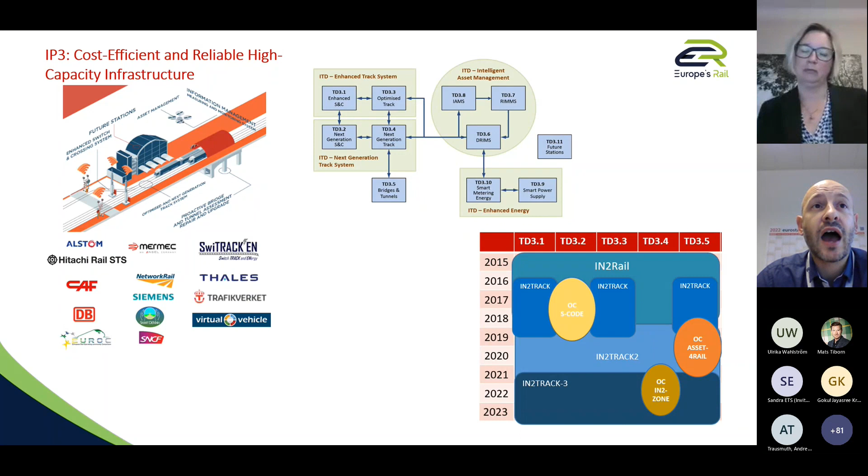I would also like to present a little bit what is coming next, because In2Track3 will end in 2023, but it will obviously not end the research in Europe's Rail regarding this area of investigation. Europe's Rail has been divided - the next program starting now has been divided into 7 areas, so-called flagship projects, dealing somehow with the same areas of research that Shift2Rail supported. However, the structure is slightly different, and the objective is to aim for even more digitalization of the sector and even more green solutions.

In this program, there is one specific project called Intelligent and Integrated Asset Management, currently under grant agreement preparation, that will take over most of the results of In2Track3, either to bring them to a higher maturity level - really industrialization - but also to investigate some new topics and new areas of research that were starting in the context of In2Track3 and other projects. So FP3, flagship project 3, currently under preparation of signature, will be the next project to tackle all this infrastructure problematic and also innovation into the next program.

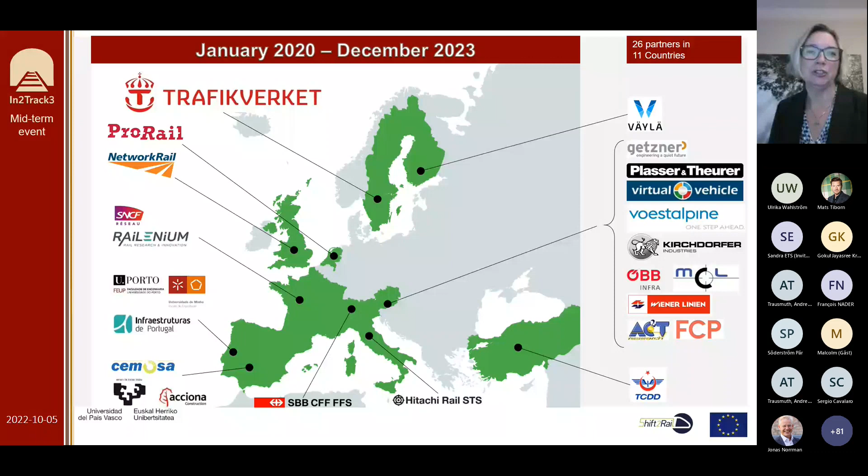We started in January 2020, and as Sebastian said, we will finish in December 2023. This is not up for negotiation - we cannot say we'd like to prolong things a bit just because we enjoy this, because everything ends in December 2023. Everything that comes after that will be Europe's Rail, in which, as Sebastian mentioned, our research will be taken forward - some of it, not all, but some.

We have a pretty wide coverage with our participants. As I mentioned, we have infrastructure owners, managers, and operators, the ones mentioned here.

Large companies or authorities, government bodies that have as their purpose to make the railway run efficiently and smoothly, and who are very much interested in getting the new technology and knowing more about how we can do our respective railways and system better, cheaper, more cost efficient, and increase the capacity, if you remember the overall goals we have. We have a number of universities and research R&D centers.

These are the ones that are our partners, who are actively contract partners in the project. In addition to these universities and R&D centers, we have a number of third-party companies, for instance Trafikverket, Network Rail, and a few others. So there are twice as many universities as in this picture who are connected to us to vouch for us doing the proper research the proper way.

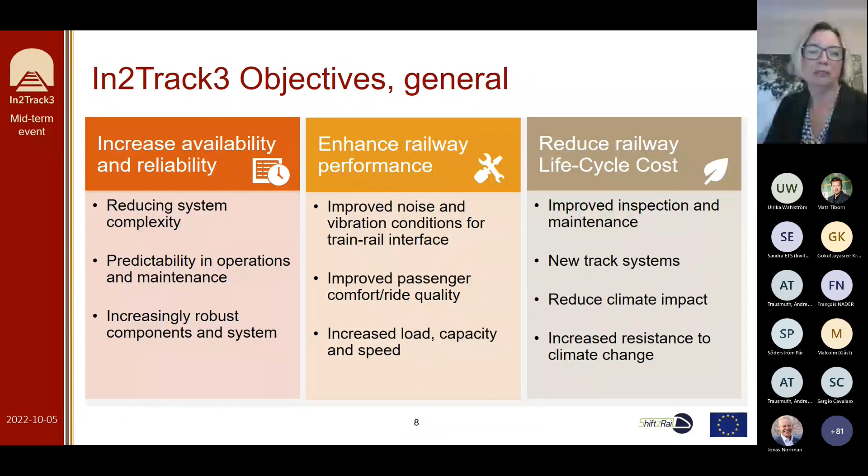This is still pretty high level. So what is it actually that we do? Well, one thing that we do that is easy to see, that is tangible, something to look at, feel, touch if you're in the right place at the right time, are our demonstrators. Like Sebastian said, the expectation on this project is to continue work from In2Track2 and In2Track, and even before that In2Rail, and to increase the TRL levels. I believe most of you are familiar with those, where the lowest level in our project is TRL 4, where we have the technology validated in lab, and the highest is TRL 7, where we have the system prototype out in the field.

Most of our demonstrators are actually on TRL 7. I'm guessing now, but I think the largest of those is the new slab track solution that we have installed in the Swedish railway. But we also have really small ones, like down to the left, where we try and just put a tiny bit of material on the railway or on the rail itself, just to see - does this work for fixing broken railway, if there are just small damages? Maybe not. It's out in the track being tested, TRL 7.

But we also have other things, materials that are intelligent materials that can send signals and show condition of the rail or the sleepers or other things, which is also very interesting, which was presented at InnoTrans also - it's in the middle bottom. And up on the top, we look at non-chemical ways to master vegetation. That's one of the ways we try to improve the LCC aspect of things. Is it possible to do something else than to just spray the side of the railway with pesticides? Well, we think so, and we want to try and have a look at it.

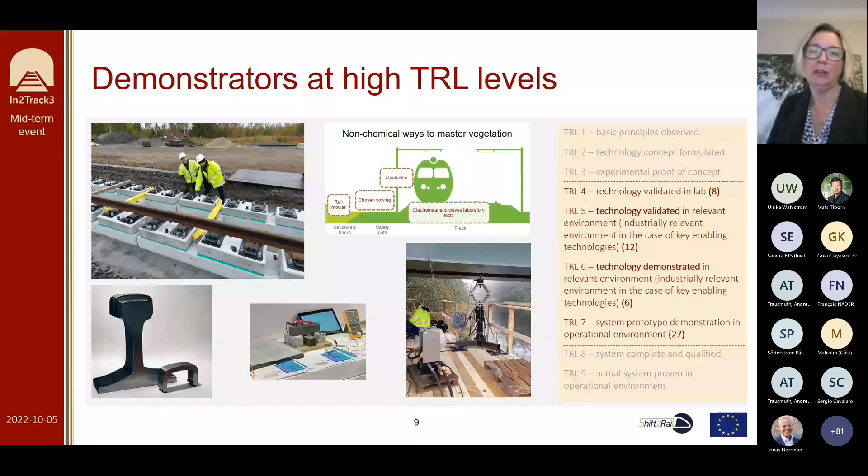So what do we do then? How do we get these results out? Well, we have In2Track3 at certain TRL levels. We are supposed to be at TRL 7 for many of our exploitable results.

The first, what do we do? How do we do it to try and get the exploitation of these results? We started about a year ago, where we had our first results, with a short description of potential, what could this be? All partners have been involved and given their opinion on their individual performance in the project—is there anything here that we can exploit and that can be useful to industry? Everyone was involved in that.

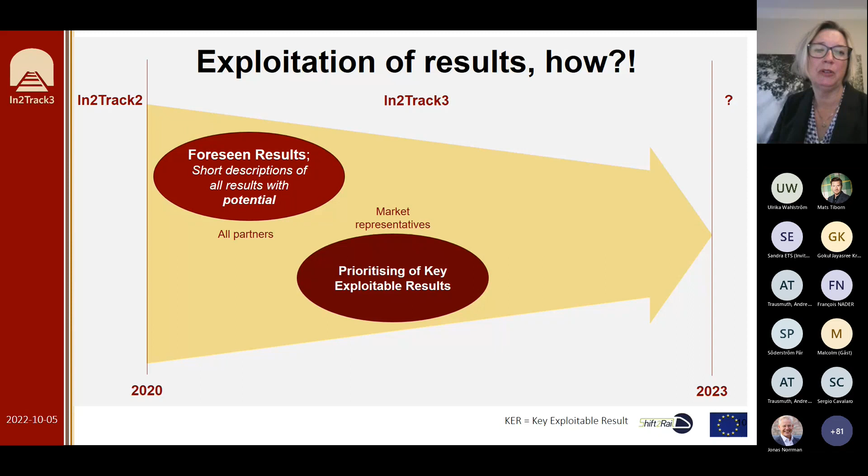Now we are halfway. We have started to narrow it down with a smaller number of participants, prioritizing the key exploitable results, not all exploitable results, but a few. And then eventually we will have a list of our exploitable results to take further. I will tell you more about this in the closing, how we will do that.

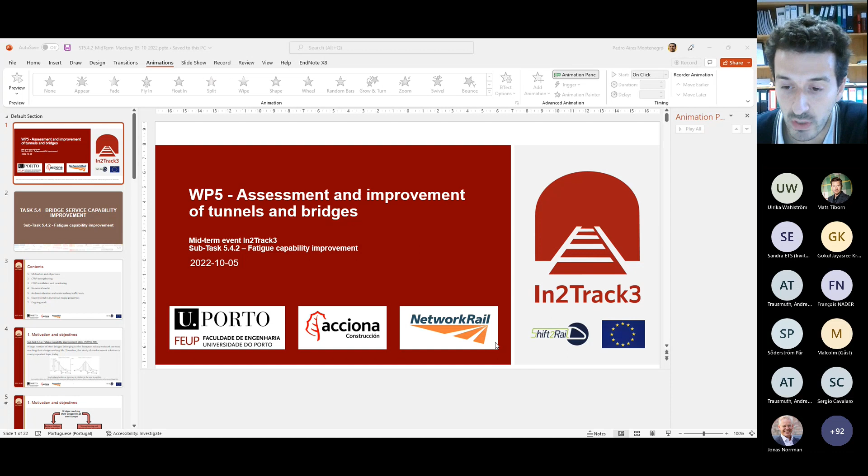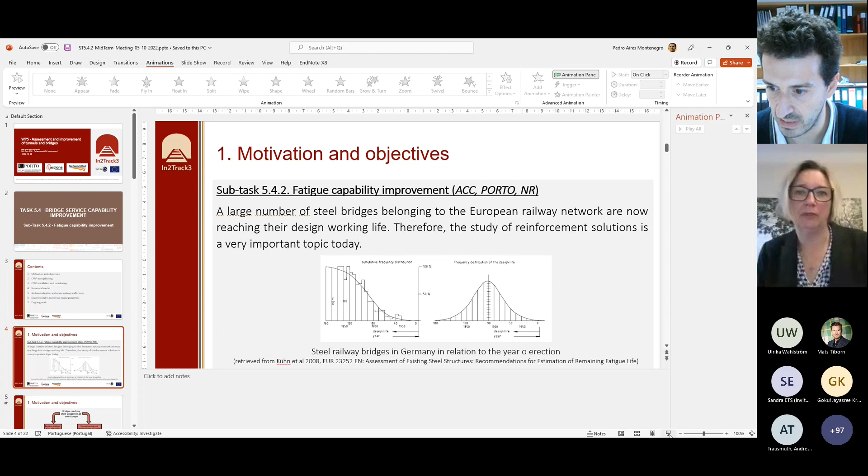Pedro, I think you should be in presenter mode because the slides are not changing, and you're probably sharing the wrong screen. Oh, sorry, let me just change it and go to presenter mode. But I'm in presenting mode. Now, perfect, is it changing now? Yes, perfect, okay thank you. Sorry, no problem, maybe there was some lag here.

So as I was saying, some of the bridges in the example in Germany are already more than 100 years old, so we need to study reinforcement solutions. Why reinforcement solutions? Since the bridges are getting old, we have two options: replace the bridges with new ones, which is a low sustainable solution both from an economic and ecological point of view, or try to study strengthening and reinforcement solutions.

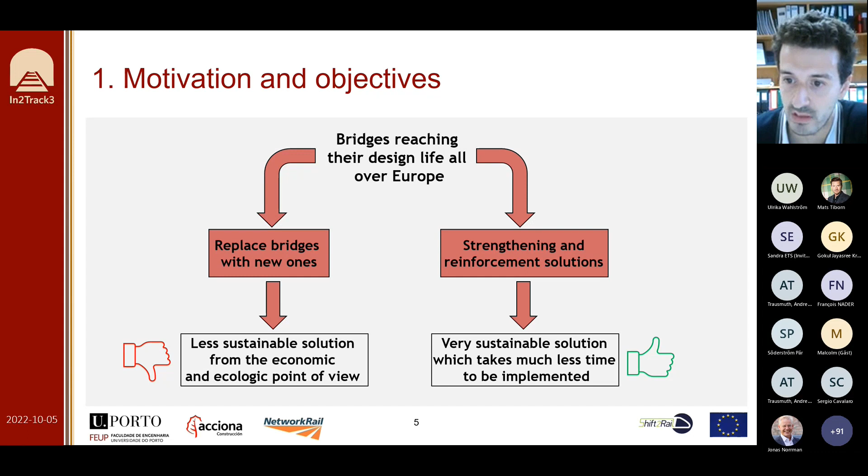So here in In2Track3, we are trying to work more on strengthening, particularly with CFRP solutions. The main objective of this part of the work includes the evaluation of fatigue life extension of fatigue problem details from a demo bridge, the Eastington Bridge in the UK, that was strengthened with externally bonded FRP plates during In2Track2. Here in In2Track3, we are trying to test if this strengthening solution is working well or not.

The demo bridge, the Eastington Road Bridge, is here in the UK. It's a bridge with a 25 meter span, with some skew, and it has 3 main girders, box girders, connected with cross girders.

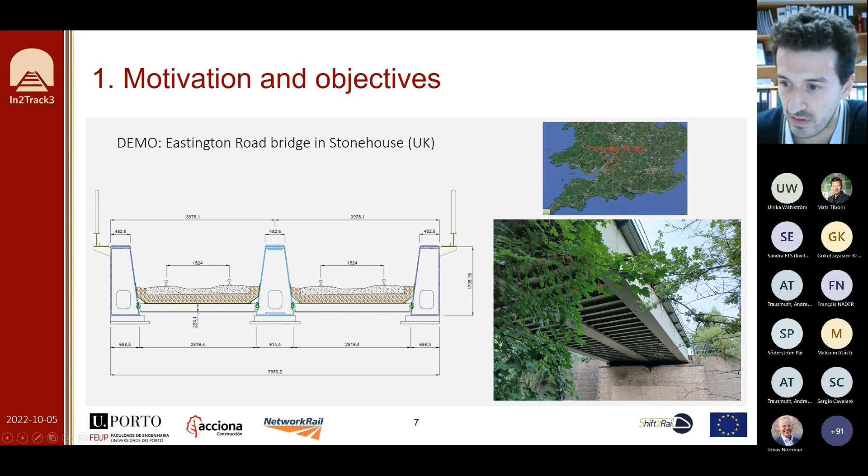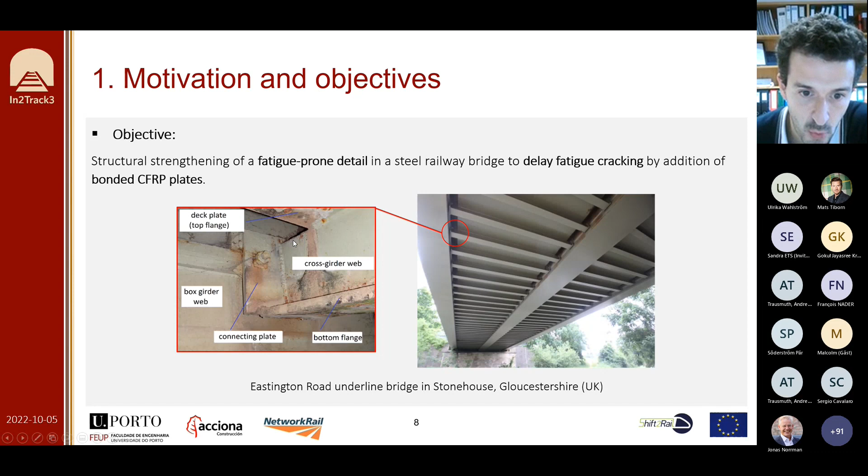There is a detail here that is a fatigue prone detail. I will explain why it's a prone detail: it's a detail where the top flange of these cross girders separates from the web. We can see a decrease in flexural stiffness in this part of the cross girder. So why are we studying this detail?

Because there are more similar bridges in the UK, and one of them, over the River Tone, which is very similar to this one, is going to be replaced. That's why we are not studying this particular bridge, but a similar one. Network Rail already detected a fatigue crack there. So we are trying to work on this type of detail to see if these strengthening solutions can avoid these fatigue problems or not.

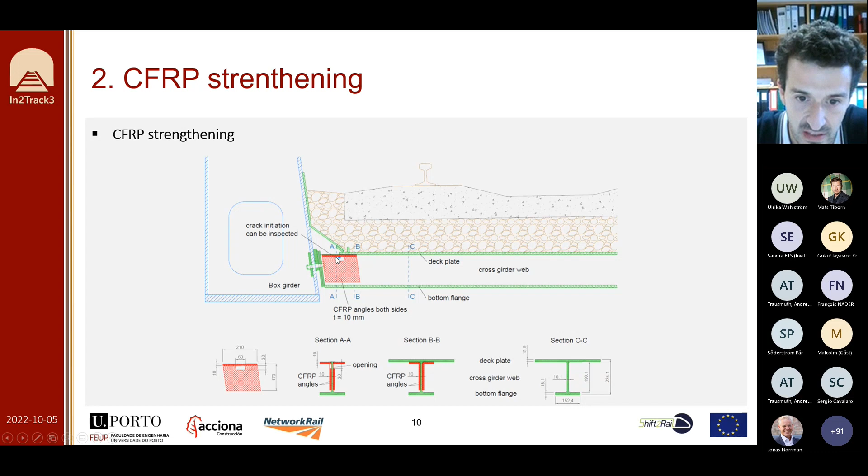Regarding the strengthening, it has been designed and installed by Acciona. It consists of L-angle type CFRP plates, located in the fatigue prone detail area, with some room left in order to inspect if there will be cracks or not. I will talk later about the monitoring system that was installed last year.

Before installing these plates, Acciona made preliminary laboratory tests in Spain, simulating a similar detail to test if these plates are capable of reducing the tensile strain in this area. From these tests, Acciona reached the conclusion that they could reduce the tensile strains in these locations by about 32%. So in principle, this type of solution should give us good results.

Regarding the installation on site, as I mentioned, the installation consists of these CFRP angles, which we can see here in this area. This installation shown here is not in the lab, it's already in the bridge, which was installed in 2021. It had to be postponed due to the pandemic.

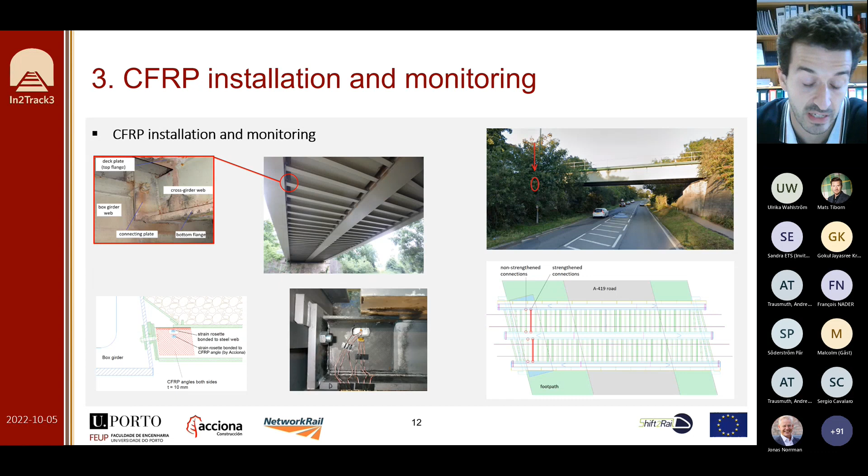To compare the influence of the CFRP, they installed it in two cross girders, and monitored with strain gauges not only the cross girder with the reinforcement plates, but also another cross girder without the plates, to compare the strains that occur at these points.

Here are some images of the installation. It took place, as I said, in two consecutive cross girders, one with reinforcement and one without, to compare the efficiency of the reinforcement.

This is a permanent monitoring system that is always capturing results. It has triggers in order to save the results, so it only saves results when trains pass over the bridge. These triggers detect when the strains start to get a little bigger and start saving. Since this is a permanent monitoring system, Acciona and Network Rail installed a cage with a methanol power source, and of course the data acquisition system.

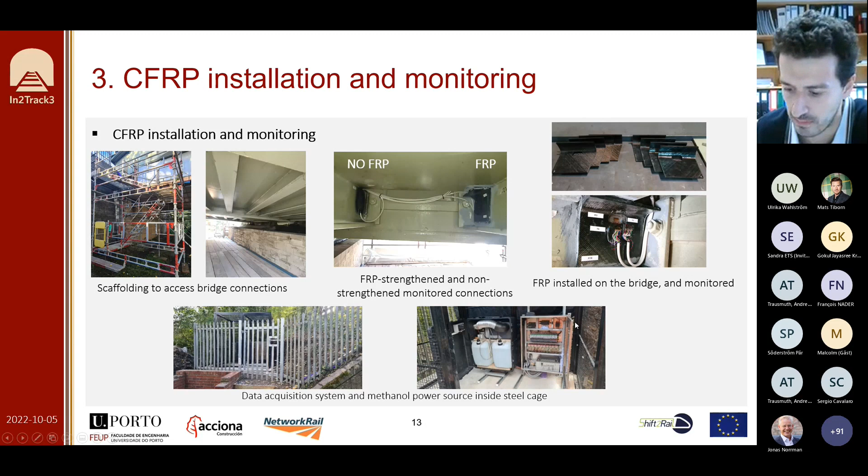The results from this permanent monitoring system are connected to an online platform that Acciona has access to, and we can see in real time the strains occurring in these different details, both with and without the CFRP. As you can see in the right image, with the plates we have strain gauges in this part to detect if there will be a crack or not, but we are also measuring strains in the CFRP itself.

Of course, in the other cross girder without CFRP, we are measuring in the same positions, but in both the strain gauges are directly on steel.

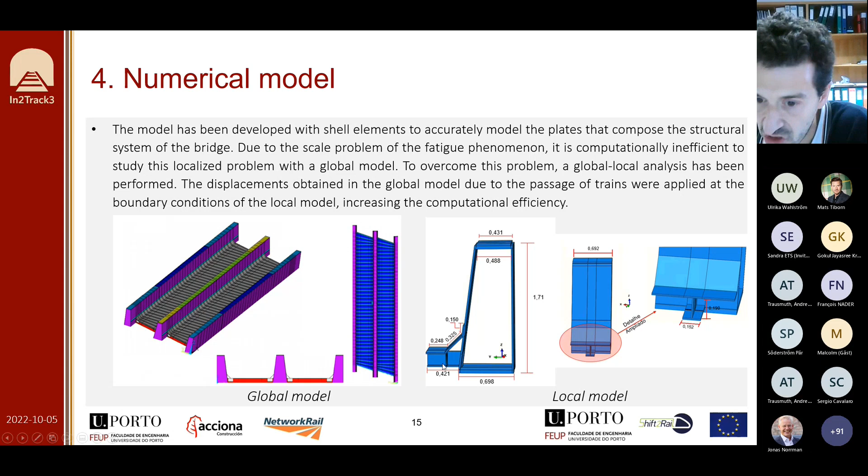To perform this numerical analysis, it would be impossible to perform dynamic analysis with a full model with a lot of detail in the region of the fatigue-prone detail. So you perform dynamic analysis with the global model, extract the boundary conditions around the fatigue-prone detail, implement those boundary conditions from the response of the dynamic analysis into the local model, and work more efficiently in this localized area of fatigue with the local model.

But of course, to rely on these models we have to calibrate and validate them. For the validation we have 3 steps. The first step is validation based on the modal parameters of the bridge, which we got from the ambient vibration test that took place between 7 and 9 of June 2022.

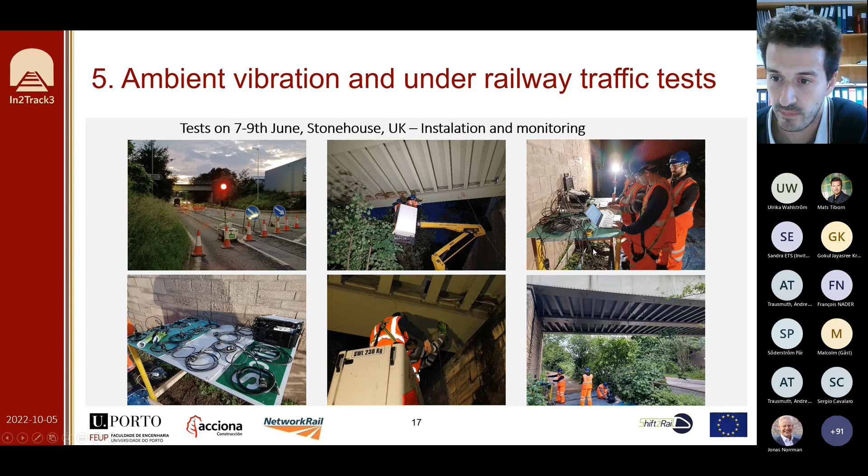Here are some images of the test. All the installation had to take place during night. We could see in real time the ambient vibration from the accelerometers, and with specialized software we could understand the behavior and modal properties of the bridge - natural frequencies, modal shapes - directly based on the vibrations obtained from the accelerometers.

Apart from the ambient vibrations, with the green accelerometers I showed before, we could also capture the big vibrations caused by trains. Here are some examples: a train with 5 carriages, you can see the results, and with 4 carriages. During one day, the 8th of June, we were continuously monitoring the bridge and getting a lot of results.

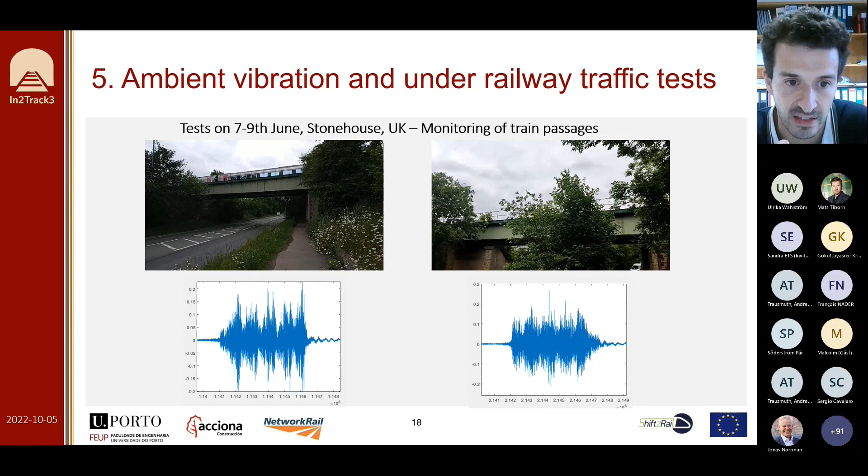This first video is a slow motion video because the train is not actually going this slow. We needed slow motion videos to understand the number of coaches crossing the bridge, since the objective of the next part is to compare numeric and experimental results.

We have to have an idea of the type of trains that cross the bridge. The first result we already got is the comparison of modal properties based on the ambient vibration test I mentioned before, and you can see the results are very good.

Each of these green and pink points are the positions of the accelerometers, and we could only monitor the first third of the bridge, but you can clearly see that we can extrapolate this movement as clearly the movement of the first mode.

Here you have the movement of the first torsional mode. The frequencies don't match so well here, but we are still trying to improve the model.

Here we can see this butterfly mode that is captured quite well by experimental tests, and here the second vertical mode. So in this first part, where we try to calibrate the global model based on modal properties, the results are quite good in our opinion.

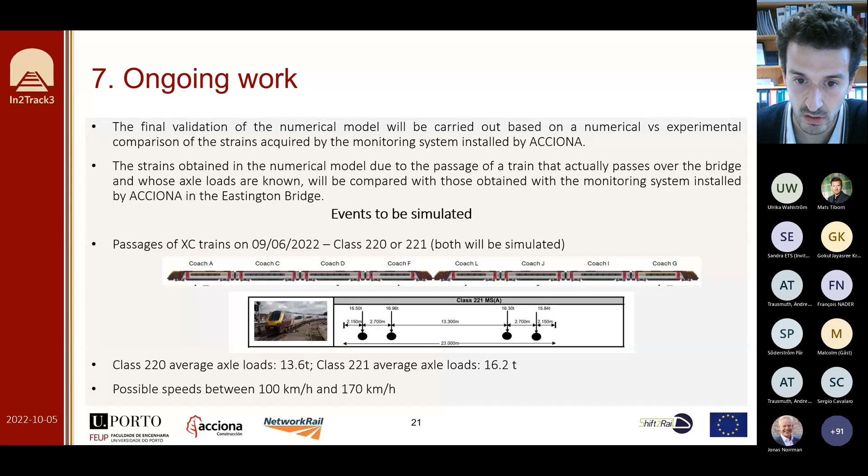Thank you very much for the opportunity to talk here, and we hope these strengthening solutions will work well on this bridge. Thank you very much.

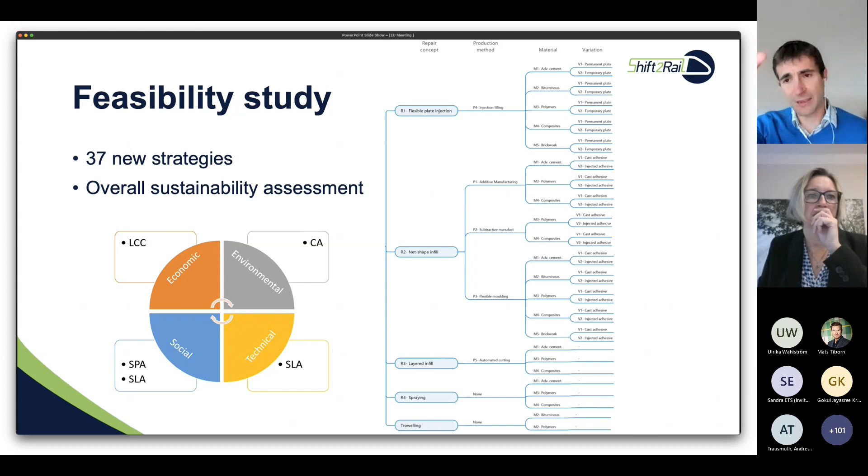What we did was scope 37 completely new strategies for the patch repair of this particular problem. We undertook a comparison between these 37 plus a reference, which is current practice, and carried out a sustainability assessment considering not only the economic aspect, which is clearly relevant, but also environmental implications, technical aspects, and social aspects, because we need to consider health and safety and how easy the solution would be to deploy. On the right side here is this huge tree with a number of different options that we tested, and without entering too much detail, what you see here is the result of this exercise.

I'm not going to enter into detail, just to let you know the solutions that provide the highest value are the best ones. And what we saw is that, interestingly, the ones we are more known for, additive manufacturing with cementitious materials, were the ones that provided the worst sustainability, the worst potential. This was helpful because it drove us in a different direction.

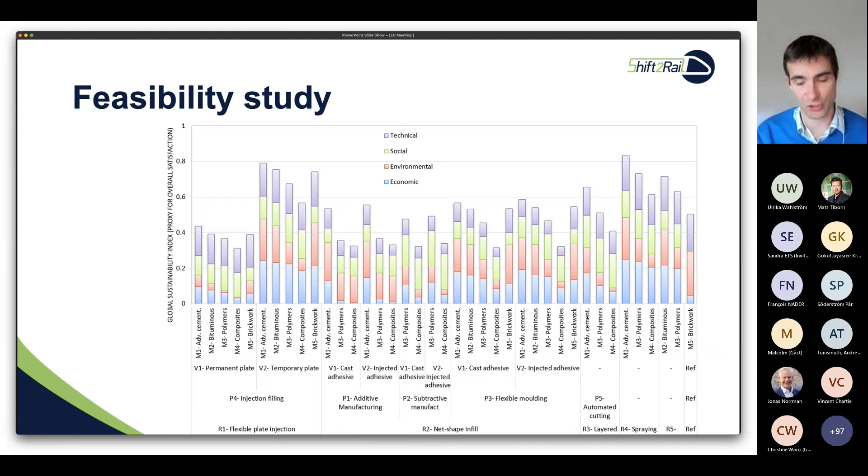Not only one direction, but several different directions. Amongst the 37, we identified 5 that were promising. Of these 5, we pushed forward 2 of them. I'm going to talk today about one of these 2, because both have been developed and taken to a tunnel for use. I'll give an overview of both, but talk specifically about one.

So one that we identified was robotic spraying: the idea of taking a robot inside and spraying the void to fill it quickly with a material that sets rapidly, allowing us to move on, repair more areas, and open for traffic with very little constraint in a single possession.

It was something we developed. We developed the robots, and it's different from the typical robots used for inspection. The same robot does both: it inspects, decides how to repair, and repairs. So it's the same unit delivering both aspects of the work: identifying, deciding, and executing.

So we did it, took it to the tunnel, and it worked relatively well, with some elements that still require improvement because, as you may know, it's complicated to have a system integrating robots that can do all of this seamlessly. So we used it in the tunnel.

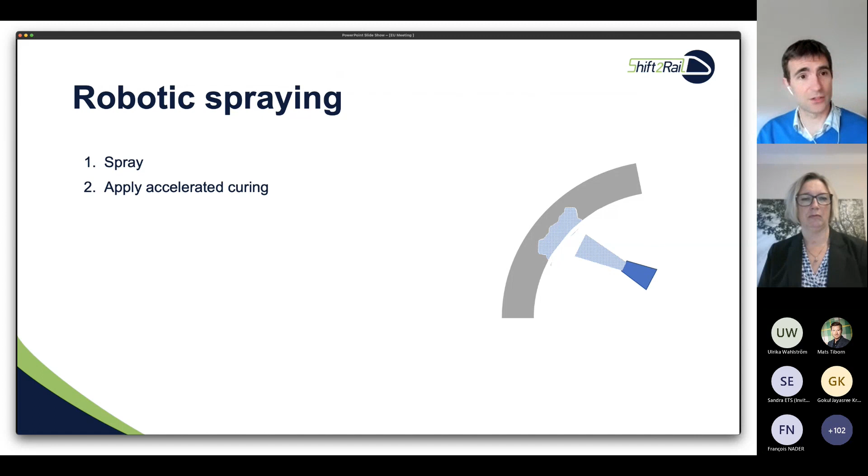I'm not going to discuss the robotic spraying here. I'm going to go into more detail on the flexible plate injection. The idea of the flexible plate injection is very simple: it's a plate that can change shape and accommodate different curvatures in the tunnel.

Once we put this plate there, we can inject through the plate, either the center or the side, and fill the space with a material that will allow us to open for traffic pretty quickly as well. So this is the solution I'm going to discuss today, the temporary flexible plate injection. Then we remove the plate and continue on.

We didn't have any experience in this space, so we started at very small scale because we didn't have any prototype or anything we could use for this application. What you see here are different views of the first prototypes, from left to right.

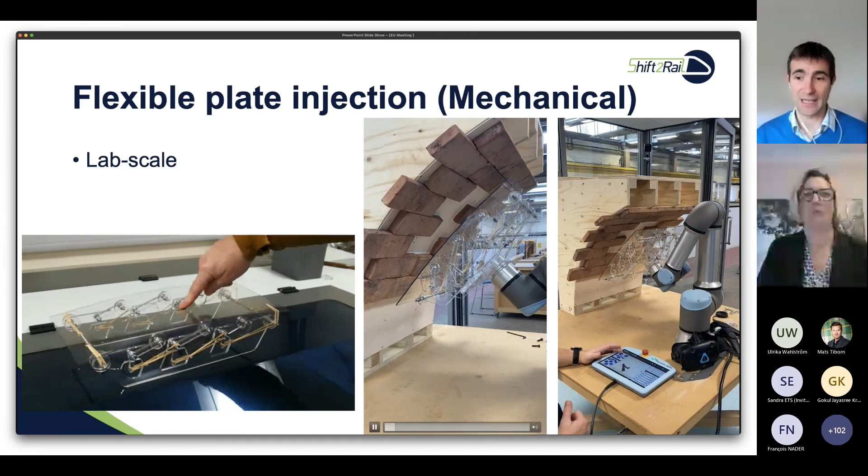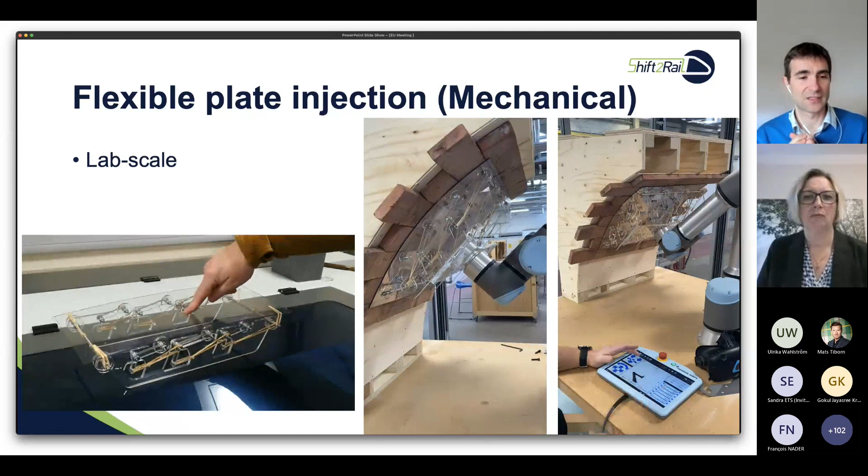The first flexible plate: the idea is that the plate can really change shape and accommodate differences in curvature in the tunnel. Very simple concept, as you can see here, initially just the plate with some elements that support and push it against the surface of the tunnel for injecting later on.

On the right side, you see a slightly bigger version, same concept, deployed by a robot at small scale on a masonry tunnel representation we had in our lab. This was the concept we designed and presented to Network Rail.

In discussions, we decided to upscale it since it was working well. This was one of the 2 concepts; we have one mechanical one, and we had one that was thermal based, using temperature to change shape. It's quite cool as well, because you just turn a switch and the plate becomes flexible, then you turn off the switch after placing it against the surface and it retains its shape.

So it was interesting, but energy and power in the tunnel, electricity, having all these installations, would be less compatible than the mechanical one. So we upscaled the mechanical one for application in a tunnel.

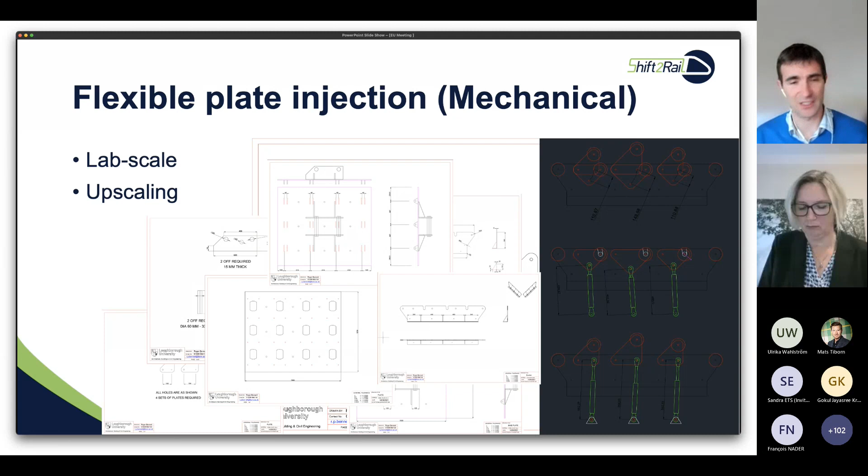Here you have many drawings; we went through a phase of designing this, and after designing, we set it up. This is just the base of the plate, what you can see here. The wheels I showed in the small scale prototype are the yellow ones in this plate. Remember, we had some wheels that push the plate against the surface. In this case, the wheels are all in the system here, and the plate is not installed at the moment, but this is just the base of the system.

And the system includes a lot of hydraulics as well, because it's hydraulic driven. So we have a number of jacks that you can see here at the bottom that are responsible for pushing the wheels outward against the tunnel, shaping and giving the plate the shape of the inside of the tunnel.

So then you see here the installation and the transportation to the tunnel, on the bottom right side. You see taking the base of the plate to the flexible plate system to the tunnel.

Then what we did was try to simulate the execution of the patch repair. We had some workers, the ones that were in the tunnel performing other repairs, and it was the first time they were having contact with this technology.

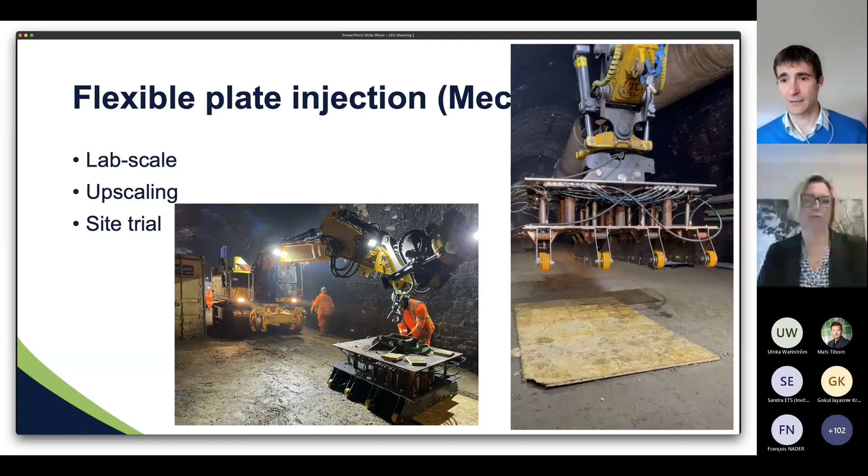So you see an RRV here that was brought for the study, and we attached the flexible plate to the RRV, and ran some tests on the jacks. Everything is controlled by the driver, who is able to control the plate itself, how it moves, and the jacks. So full control by the driver.

And after that, we installed the plate, which you can see here as the white element. So we installed the plate and went to an area to repair, as you can see here, the area to be patch repaired with the RRV.

Interestingly, when we were there, this RRV was brought for this test only, and when it arrived, it was a model slightly bigger than what we ordered. So the RRV itself was too big for the tunnel. This had implications for the test, meaning the RRV was so big it couldn't spin sufficiently to accommodate and place the plate.

We had a spacing of about 10 centimeters to one side. So one side of the plate would be touching when it approached, and the other side would have a space left between 10 and 5 centimeters, because the machine was too big to properly position the plate initially.

So the idea was, let's position the plate, then push the wheels out so it generates the proper shape, and we can inject through the system. But we faced this issue there. We couldn't do it. The machine wasn't the correct size for the application.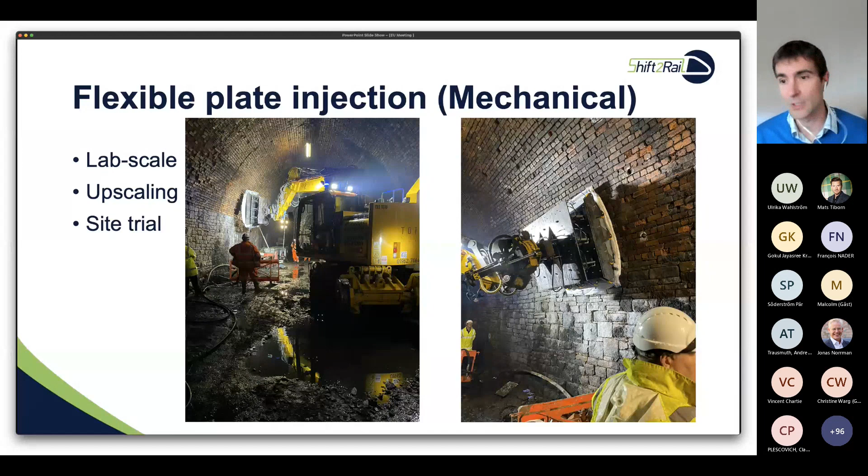This showed us how reliable and flexible the system is. Even when the machine is not the correct one, even when conditions are not ideal, the plate could accommodate. This brings a lot of resilience to the system and confidence to the workers that they can make adjustments. This is super important when designing something from scratch, something new. You need to accommodate that. And it was one of the successes of the application.

We applied it and it worked really well in different areas. You can see here a result, not only filling the space, but repointing the bricks around the affected areas. So we repaired many areas using the technology.

And now we are in phase 2 of this process. We know we have a plate that works. We are working on design 2 of the plate, lighter, more robust, more economic as well. We are developing and applying improved materials in the system.

Although this is not the focus of the next phase, it is more in the injection system. So developing the injection system to deploy these more efficiently.

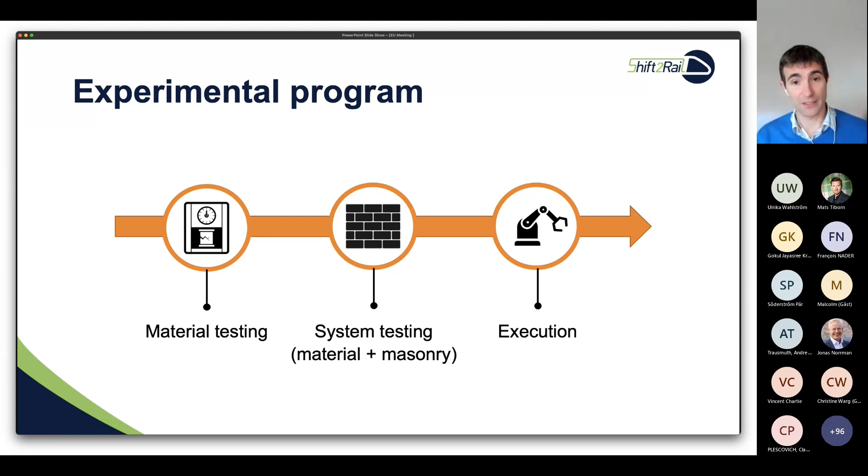We already have a system that works, and this is just some sketches of what we are doing in the lab now for the simulation of void filling with different types of materials. Here's some of the walls we have prepared, and we're running these experiments, which will last, at small scale, until December.

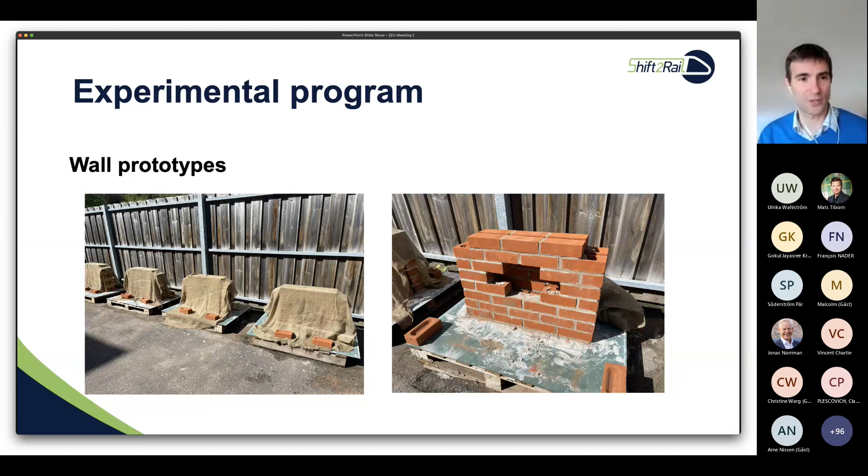And by January, February, we'll be in a tunnel again with version 2 of the flexible plate system, the new injection system unit that will be very compact to be able to easily be moved in and out of the tunnel, with a material that can accommodate different working cycles and set pretty quickly.

Just to give you an idea of the improvements we've already achieved, normally it takes between 2 and 3 possessions to repair one area. We are achieving improvements of the order of 500 to 800% in productivity, so by nearly 6 to 9 times more productivity than we had with the traditional solution. Costs are also being assessed and fully justified for improvements of the order of 6 to 9 times in efficiency. It's pretty impressive, and I think the business model here will really be justified.

Thank you very much. Happy to answer any questions if you have.

Yes, there are a few minutes left. Do you have any questions for Pedro or for Sergio? Because I don't think there is anything in the chat. Pedro, I would like to ask you, what would be your next step? If I am an infrastructure manager, how could I utilize the things that you are doing, and when can I do it? Is Pedro gone? Maybe Pedro is gone.

No, I'm here, but sorry, I didn't hear you because my headphones are not working. Can you please repeat?

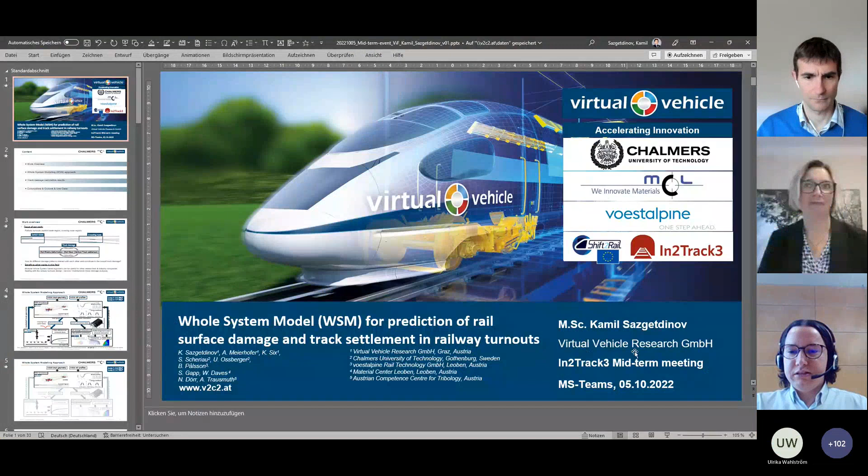Before I start, I would like to express deep gratitude to all the colleagues, first of all to Pernilla for great coordination and moderation of today's meeting, and for the great collaboration of all the colleagues working to bring the whole system model to the next level of maturity. Colleagues from Chalmers University of Technology, Virtual Vehicle, voestalpine Rail Technology, Material Center Leoben, and the Austrian Competence Center for Tribology. Thank you very much. Without you, that work would not be possible.

I've built up the content of today's presentation in the following order. I'm going to give a work overview generally, what we are dealing with, and present the whole system modeling approach, something we call WSM, to solve numerous problems appearing in turnouts. I'm also going to give you a couple of track damage calculation results with some important conclusions we are drawing from that, and we're going to end up with outlook and use cases developed for the next months of collaborative work.

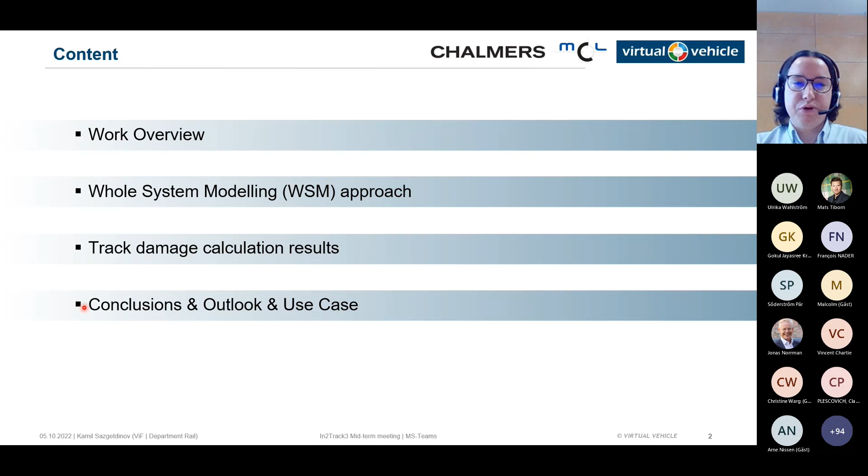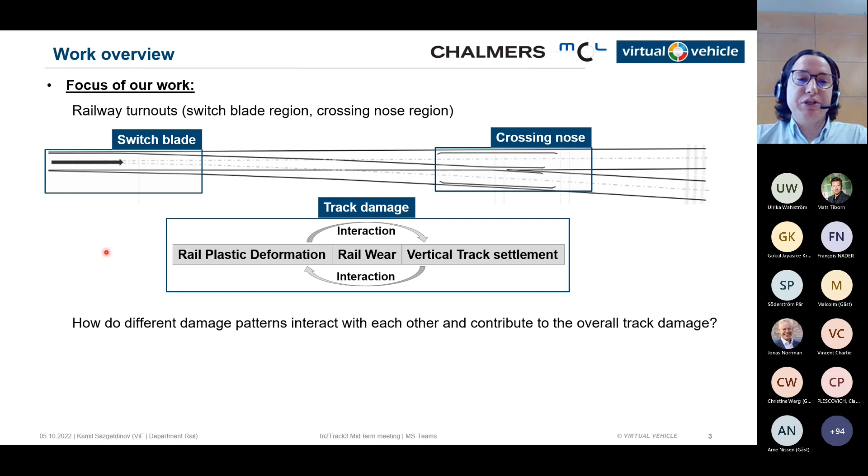Without further ado, what is the work generally dealing with? Our main focus is the railway turnout, specifically the switchblade region and the crossing nose region. What we are actually dealing with is the track damage, which results from rail plastic deformation, rail wear, vertical track settlement, and more importantly, the interaction between those modules. How do they contribute and how do they interact with each other to contribute to the overall track damage? Very important question to answer.

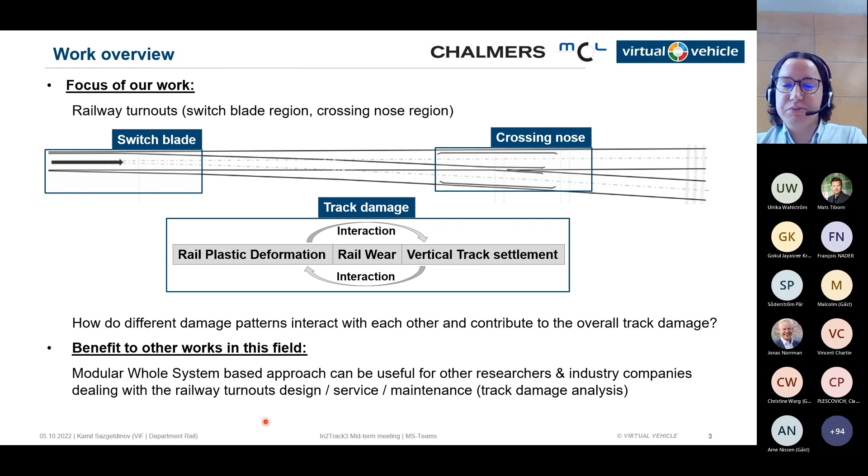And we believe that this benefits other works in the field. Not only the research institutions, but also industry partners can highly benefit from having such a powerful tool to analyze the interaction between track damaging mechanisms, because we haven't found anything similar in the literature or by the industry. We believe such a novel approach to tackle track damage will be very beneficial to somebody dealing with turnout design, service, and maintenance optimization, and generally working with track damage analysis.

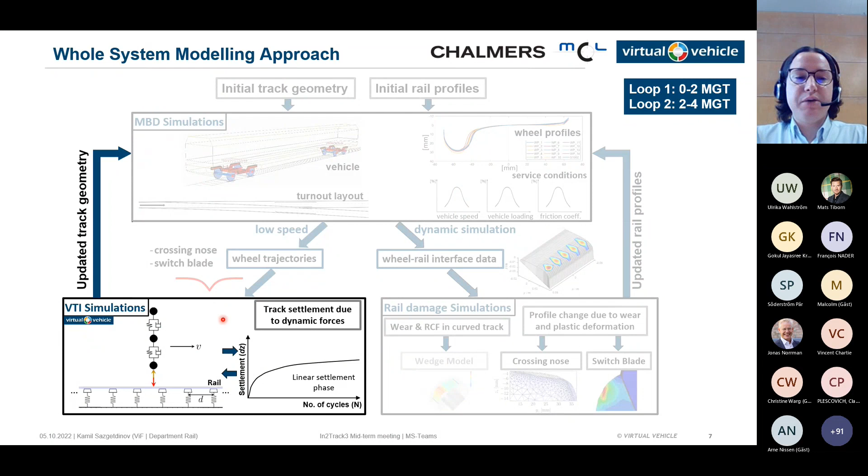A couple of words on the VTI simulation model, just to give a short idea and snapshot of what the model is capable of doing. The VTI model, the vehicle track interaction model, consists of one eighth of a vehicle on top of the rail, which is modeled as a beam with discrete sleeper support. This gives us the advantage that each sleeper can have its individual stiffness, height, subject to calibration based on field measurements, and also individual settlement properties. The model is quite flexible in simulating track settlement, and it delivers sleeper forces to the settlement model, where we operate with a phase 3 approach to remain confident in a mostly linear phase, delivering back the sleeper settlement, and then the iteration loops are repeated.

What's interesting in our case studies is that we also investigated the effect of different track stiffness profiles: a variable track stiffness profile with higher stiffness under the crossing panel, versus constant track stiffness, which can be achieved using elastic support, for example under sleeper pads. We've investigated the effects of both.

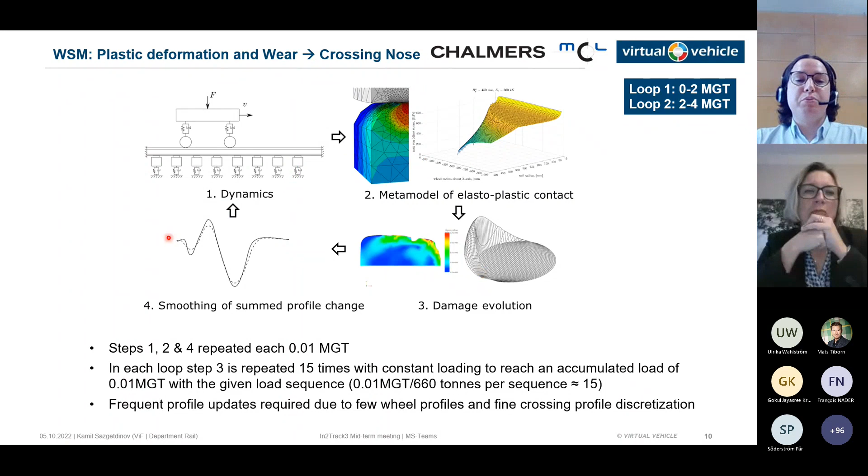A couple of words on the rail damage simulation models. They're both based on finite element methods, operating within different internal steps, ideologically including the dynamics, meta models of the elastic-plastic contact damage evolution, and then smoothing of the profile change. At the crossing nose, in the same manner, finite element method based models operate at the switch panel as well, using an extrapolation algorithm to increase the performance of the module, also calibrated against multi-axially loaded stress control tests.

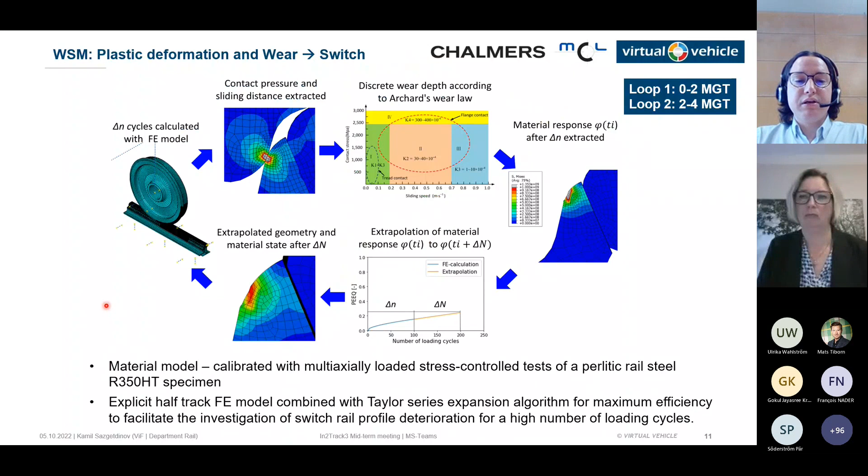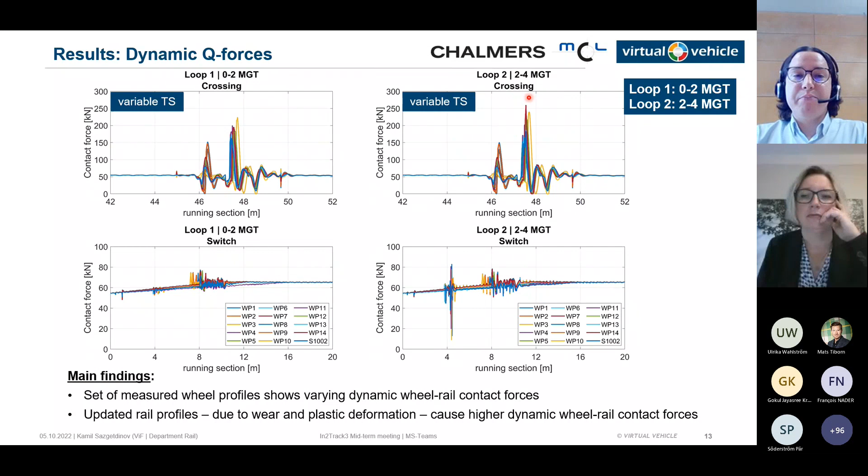We also know the behavior of the contact Q forces and the way they change and increase, specifically at the region of the crossing panel at the tip of the crossing, as well as in the switch panel. We can see not only how those forces evolve qualitatively as the track is in operation, but also the values of how those amplitudes are changing. So it's a very powerful tool to analyze further and do further statistics.

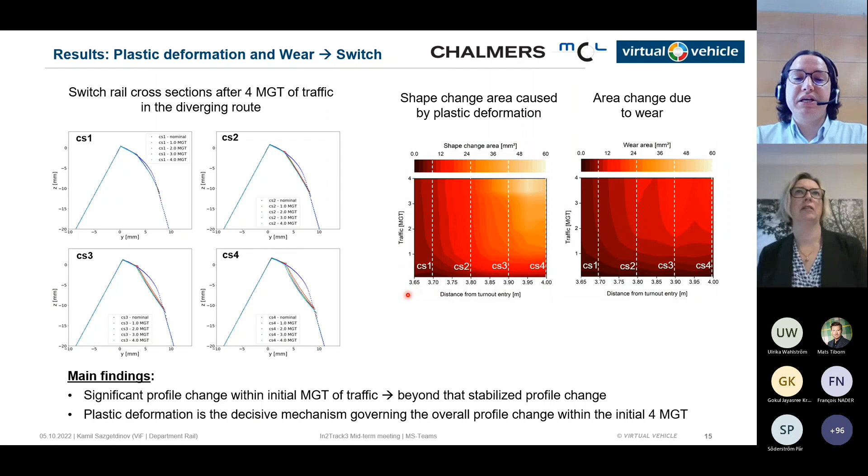In the same manner, we see the same observation for the switch panel, with significant profile change within the initial MGTs of traffic, and beyond that a stabilized profile change. The plastic deformation is identified as the decisive mechanism governing the overall profile change within the initial traffic we've simulated.

Interestingly, if we analyze the combined effect at the switch panel and crossing panel with constant versus variable track stiffness, we see that switch panel track damage is much lower compared to the crossing panel, mostly due to lower dynamic Q forces. We also see that the subsequent increase of track settlement is a bit more in the case of constant track stiffness compared to variable, but generally we achieve less track settlement when we use constant track stiffness as compared to variable track stiffness.

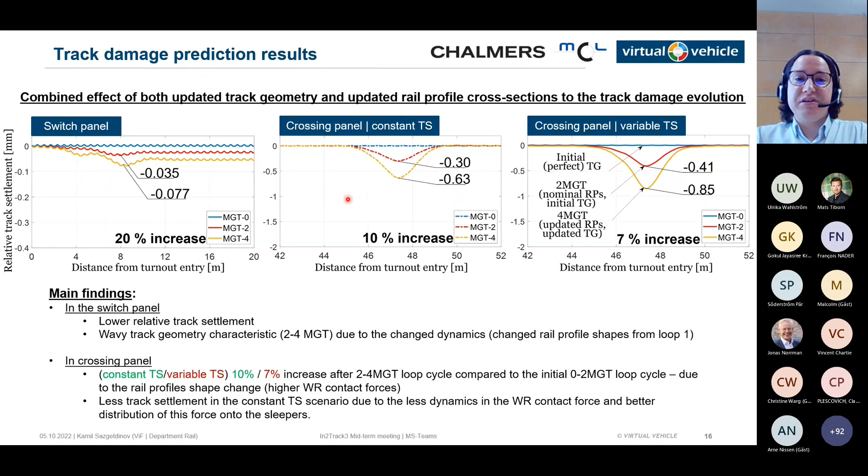Not only can we see the general behavior of the model, we also have exact numbers to quantitatively validate and describe the performance of the different cases of the track.

We also find that the track geometry changes contribute more and more to the track settlement, which results in a self-reinforcement behavior of the track.

Very interesting knowledge there, and the whole conclusion here can be interesting to read when I distribute the slides among the participants. Very interesting insight into rail damage analysis, track settlement effect on the crossing nose, and also the combined effect of rail damage and track settlement analysis.

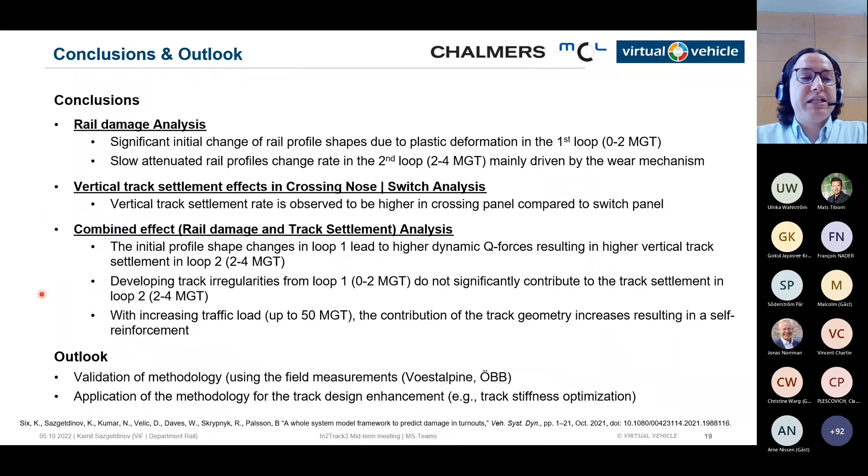This is all interesting, but how can this actually be validated and applied to a specific use case scenario? We've talked about that and pretty much closed the whole loop here, and we started thinking about the real case application. But before going to that, I would like to point out the use of all the information and conclusions I've just shown you.

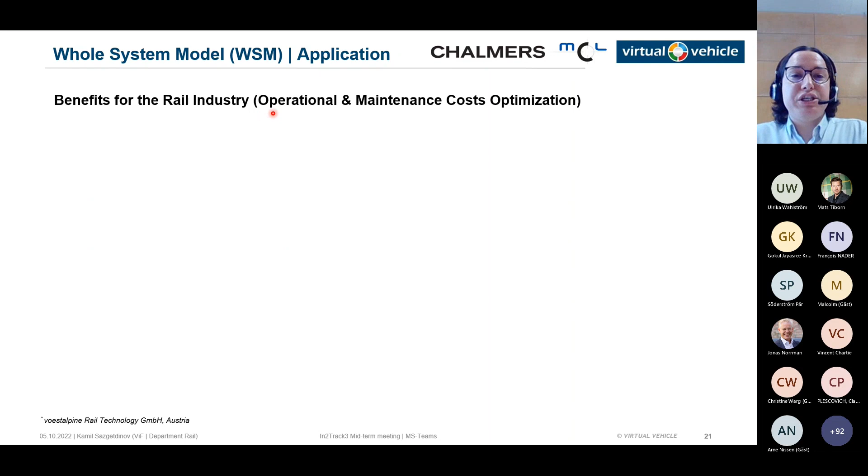I believe, and we believe generally, that the benefits for the railway industry lie in operational and maintenance cost optimization by having a time-efficient predictive whole-system track damage model, which can account for the major damage mechanisms, their effects, and interestingly their interaction.

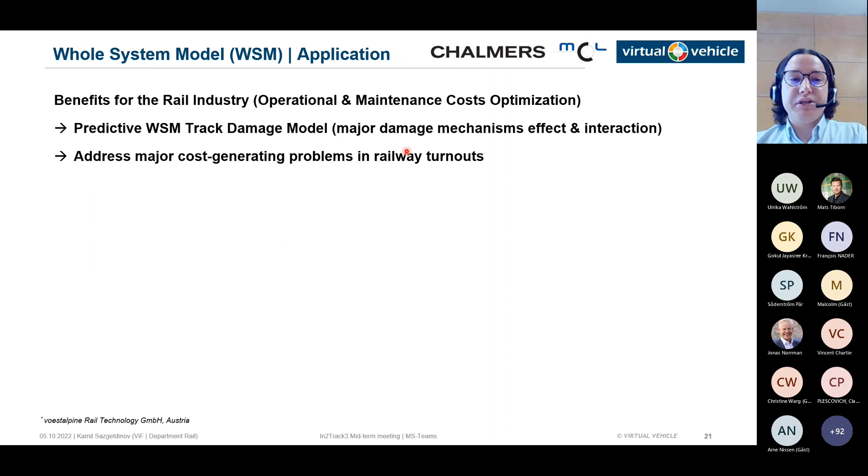By having that tool, we're going to be able to address major cost-generating problems in railway turnouts, which, as we know from the case study done by colleagues from Voestalpine, are pretty much like an iceberg. So we have to concentrate a lot of effort to analyze and optimize the system when it comes to costs for maintenance, replacement, and reducing downtime, by having a time-efficient turnout performance and LCC optimization tool with the whole system model. It also gives some advantages as we use the modular approach, as I've shown you.

Because more modules can actually be incorporated into future upcoming projects into WSM, this gives the flexibility to determine which critical damage mechanism is actually to be accounted for in a specific turnout design and region, as we have vast variation also according to climate within the European Union. Different mechanisms can also be included, such as rolling contact fatigue, breakouts at tip, and ramping at transition.

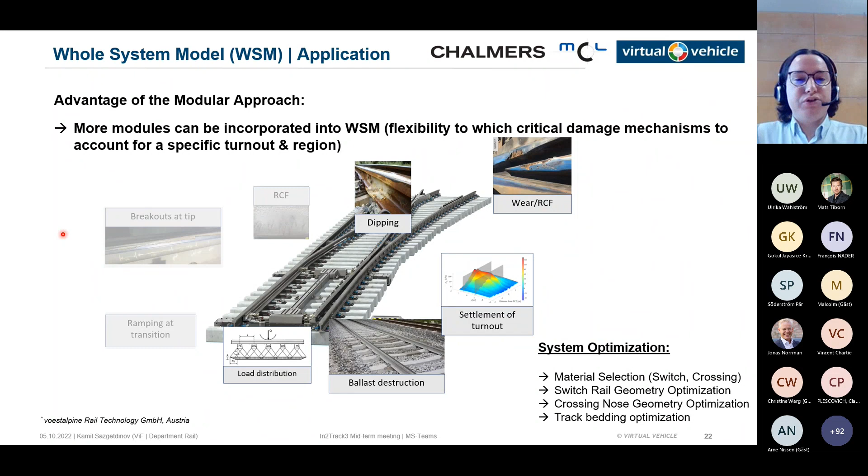Then we can start doing different system optimization when it comes to material selection, switch crossing panel, switch and crossing nose geometry optimization, and also track bedding optimization, giving important advice to the producers and to the network operators.

Currently we are performing a couple of tasks here to demonstrate the use case of the model. For that, we've chosen the Shift2Rail turnout demonstrator placed in Vienna, Liesing. We're using turnout number 4, which has also been optimized, and we want to investigate the results here, putting the main focus on track settlement, rail damage, and wear.

Here you can see the technical drawings generally of all the installed turnouts here, as well as the satellite images, with a lot of different instrumentation performed by Voestalpine, ÖBB, and Getzner.

We've talked with colleagues and identified different critical zones: the drive unit and the switch panel, the crossing panel with a lot of different instrumentation and sensors placed there, and the transition zone between the long sleeper and short sleepers.

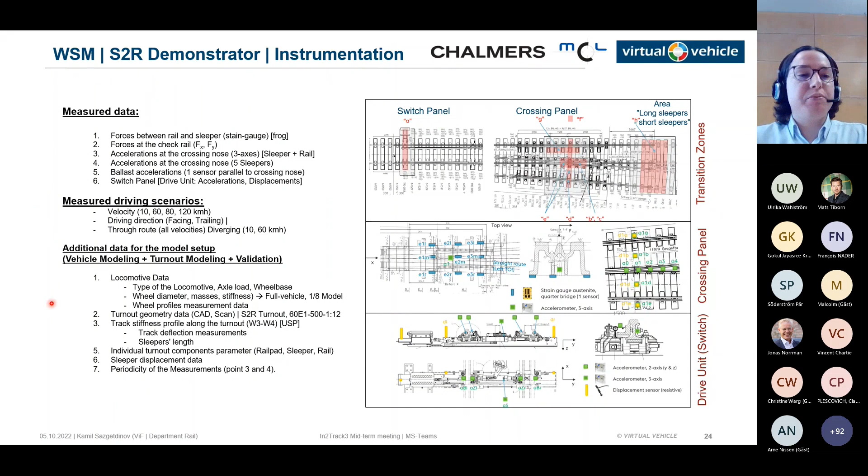We've set up the different measurement data requests, identified the driving scenarios, and also took additional data to parameterize our vehicle and turnout models, and to validate the whole system model. A lot of data, as you can imagine, so we have to do structural analysis of it.

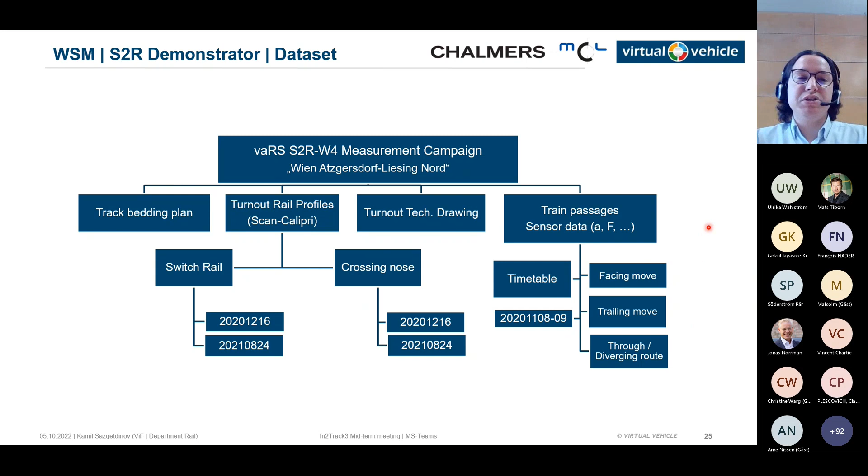For that, we're mostly working with the turnout rail profiles and the train passages with the sensor data, performing comparative analysis between the simulation results and the field measurements.

The model that I described before is now being reparameterized to mimic the ER20 locomotive, which was also used for the measurement campaign, resulting in the parameterized MBD simulation model.

When it comes to the track, we're also using the Shift2Rail demonstrator turnout data, reparameterizing the track and implementing the measured rail profiles there. This is current work that's underway.

Additionally, we've also developed internally algorithms for the automatic realignment of the profiles as we receive the data in raw format, and then we can generate different scenarios in the through and diverging route. This tool automatically aligns the measured profiles, which come as input to the co-running track model for the MBD simulations.

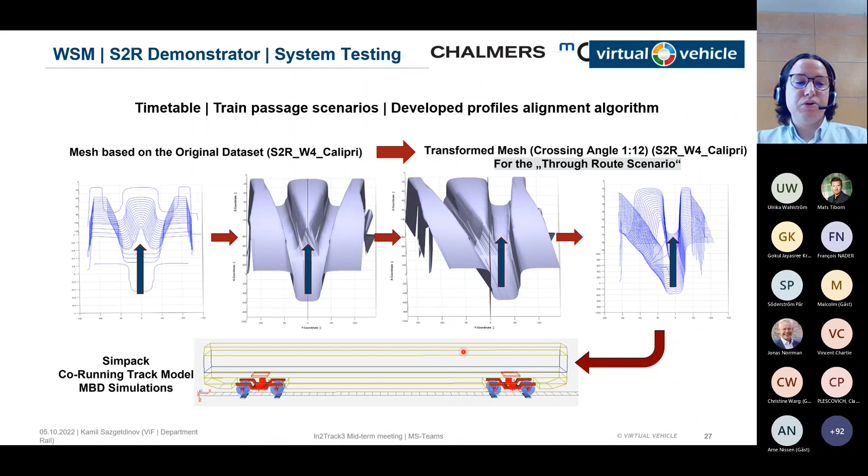There is work being performed also with the train passage scenarios. Out of the whole timetable of the measurement campaign, we were able to identify the most critical and relevant scenarios for the facing move, trailing move, and both facing and trailing moves, giving us 12 different scenarios that we can simulate.

Currently we're working with the MBD model testing at 120 kilometers per hour speed in a through facing direction. A couple of preliminary results that I wanted to show here compare the Chalmers University of Technology results and the VIF results.

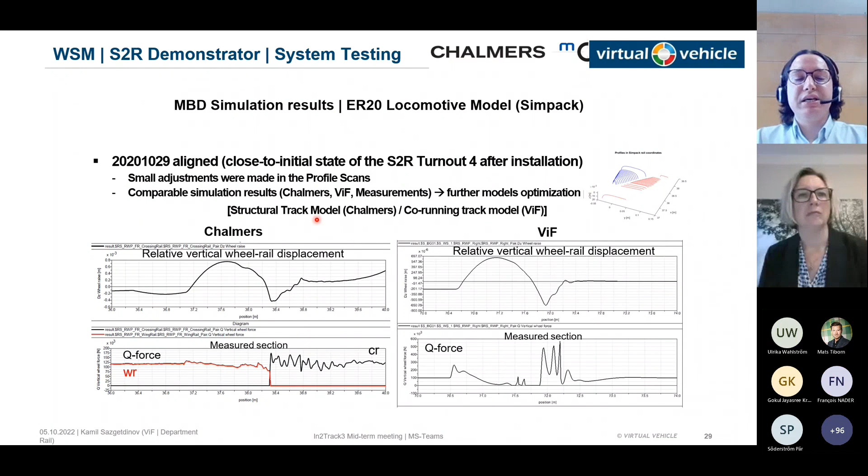We're trying to also analyze the co-running track model performance as compared to the structural track model, and those are the initial results. We're going to be doing further refinement and further workflow development within the WSM as well, something I wanted to mention here.

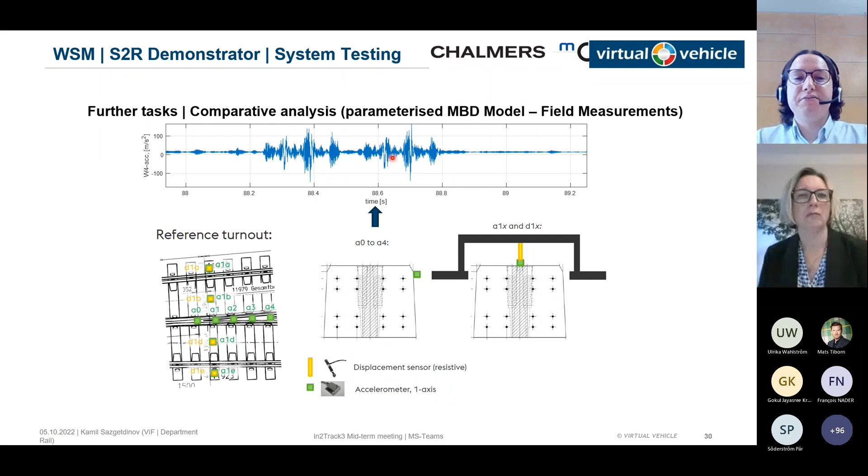If we just analyze the block in the bottom right part, we're going to be achieving better performance by having developed meta models here to try to find a replacement for the finite element methods, to better reduce the bottlenecks, moving from the order of weeks to the order of hours, and to align the overall WSM model performance.

And we're going to be able to do that by having the meta models developed and calibrated using the test rig data generated by the AC2T colleagues. So thanks for that collaboration as well.

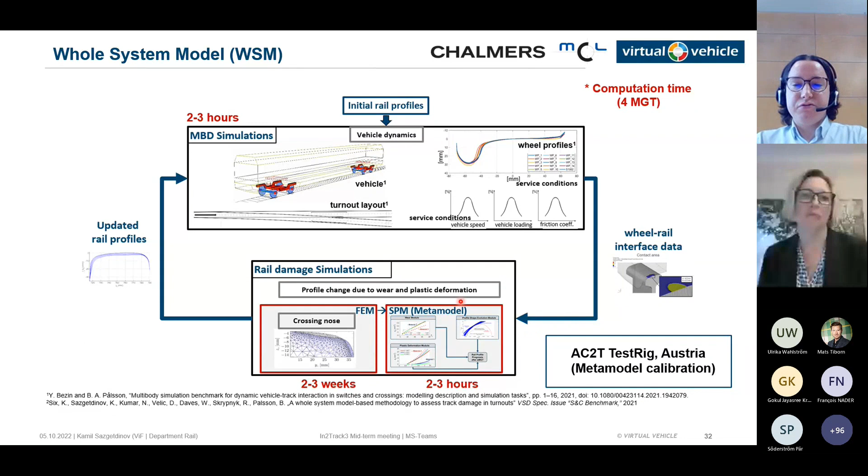So with that, I would like to wrap up for now as time is ticking. I would like to thank the co-authors without whom this work would not be possible. For contact and questions you can contact me directly, any of my colleagues, and also Pernilla and Michael Speer from the virtual vehicle. Thank you for your attention. Please feel free to ask some questions, as there have probably been a lot of interesting topics that we can follow up and discuss.

Definitely, thank you so much, Kamil. As you said, there is really some flexibility in this schedule, so if there are any questions for Kamil, please feel free to ask them. Otherwise, we move on to the next part.

Are the wheel geometries also updated in the loop, similar to the rail profiles, Kamil? Yeah, thank you for this question as well. We are using this set of wheel geometries, which are pretty much constant, so we're not doing updates. They're measured, and then used within the whole iteration of the loop. They're not being updated, just used the way they are, as we believe the wheel profiles are not subject to as severe changes as compared to the rail profile changes within the initial traffic, so to speak. I hope that answers your question.

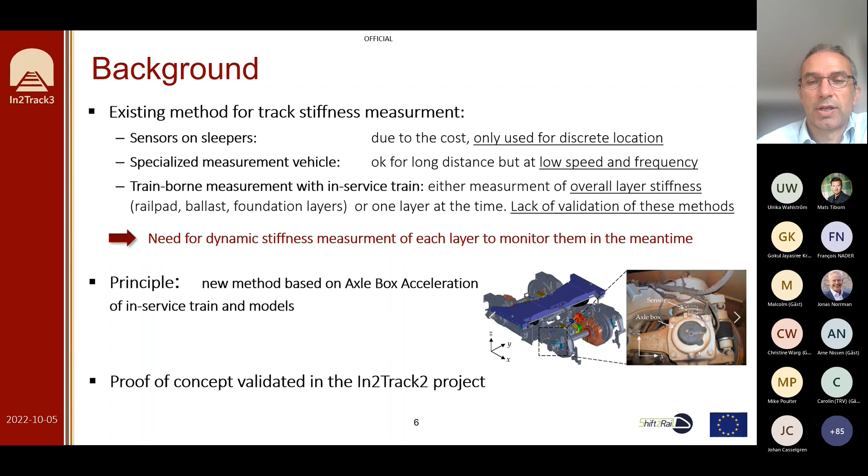So we want to improve that by using a method based on the axle box acceleration sensors that are located in the wheel of in-service trains. It's based on this measurement and also based on models. As Pernille explained at the very beginning of the presentation, this is a continuation of the In2Track2 project, because the proof of concept was done during this project.

So the goal of the In2Track3 project for this method is to validate the method and carry out some in-field tests in order to reach a TRL 5.

Basically, just in a few words, the approach of this technique is to use a model that defines a model of the track, defining a library of possible track stiffness and track displacement based on different loading on the rail, on the track. And on the other side, there's the measurement made by the ABA sensors, and so these two inputs are handled within data-driven models that can determine the stiffness of each layer of the track.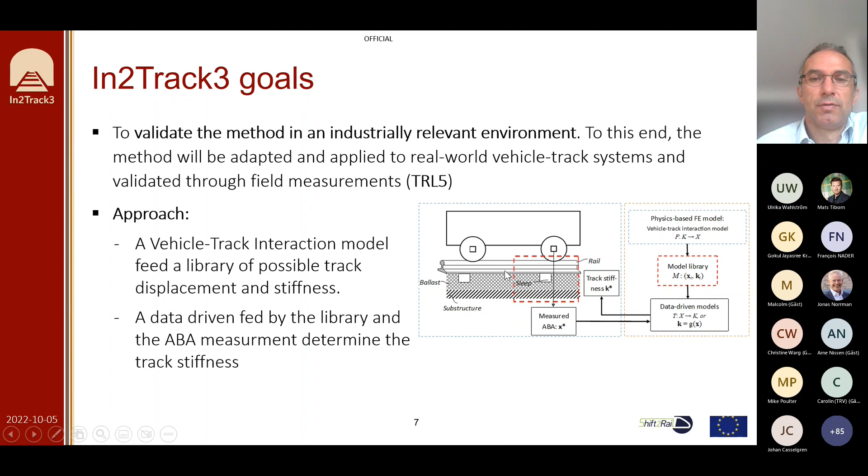So where are we now on this study? The vehicle track interaction model has been developed, and the data-driven model is almost completed - there's only about 20% left until the end. And the first field measurements have been carried out this summer in Sweden. So you can see some pictures of the test in Sweden.

And the remaining work is as follows: we have to finalize the data-driven model, which should be completed by the end of this year. There will be some additional tests done in the Netherlands by the end of this year. And finally, there will be calibration and validation of the models, planned for the first quarter of 2023. So this study is working well, and we are on track with the plan.

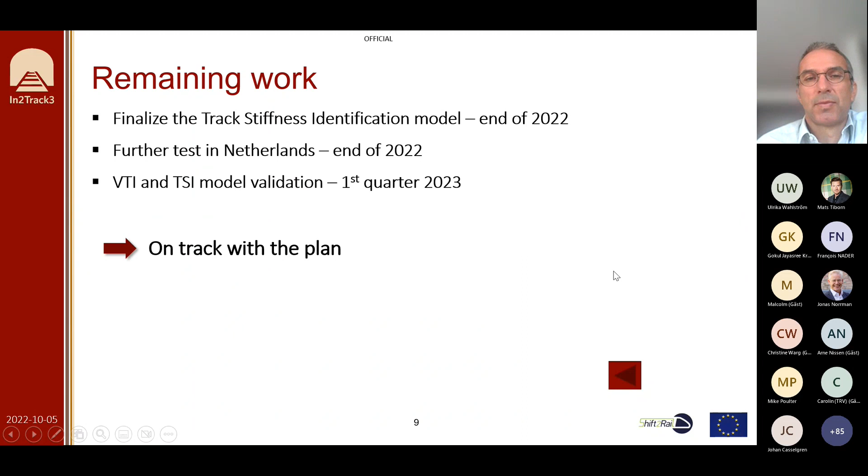So this is it for the ABA system. Just coming back to the list of technologies we are working on, I move to the self-sensing materials, which will also be used for track stiffness monitoring. This study is led by the University of Minho together with Infraestruturas de Portugal.

So what is this new, innovative system? The principle is to use, or insert, or mix piezoresistive nanomaterials, mixing them with cement and sand to create this new self-sensing geocomposite, and to insert it in the track structure below the ballast, for instance. Because of the nanomaterials' properties, it will translate the load of the train into an electrical signal.

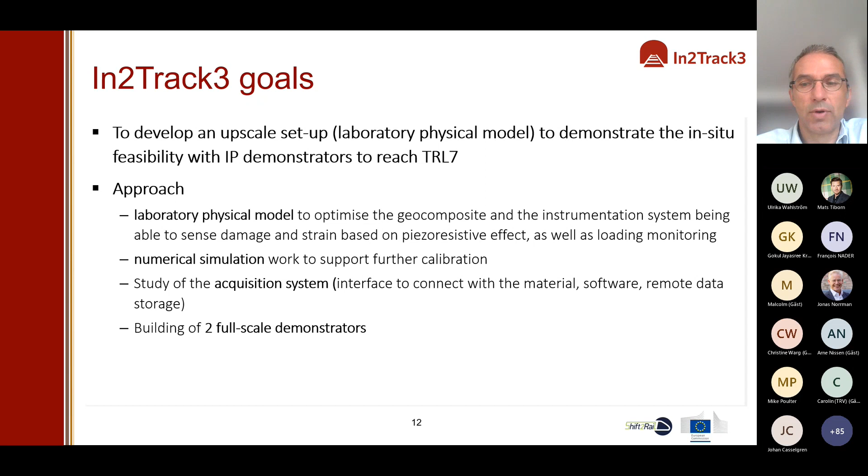So where are we at the moment? The numerical simulation has been completed, as well as the acquisition system. The demonstrator location has been defined - it will be located on a Portuguese network. Here you can see the drawings of the demonstrator. The first demonstrator will be located in the transition zone between a bridge and an embankment.

The sensors, if we can call them that, will be 22 meters long, 5.5 meters wide, and 20 centimeters thick. The second demonstrator will be over a hydraulic pass, and the sensor will be only 14 meters long.

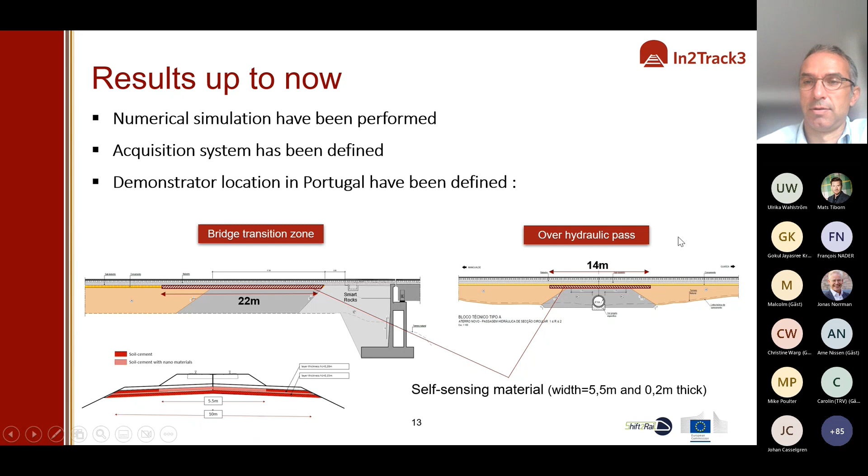The remaining work for this study is to complete lab tests in order to fine-tune the self-sensing geocomposite, and also to validate and finalize the demonstrator specification. This should be completed by the end of this year, in order to start building the demonstrator at the beginning of 2023.

This should take about 3 months, and then we will calibrate the models and validate the systems during the second and third quarter of next year. So this activity is progressing well, and we are on track with what was planned.

The third technology I want to introduce is ultrasonic waves, used in order to measure thermal stress on the rail. This study is made by Network Rail. The problem with thermal stress is that if the weather is too hot, there's rail deformation, and so you can face a risk of track buckling.

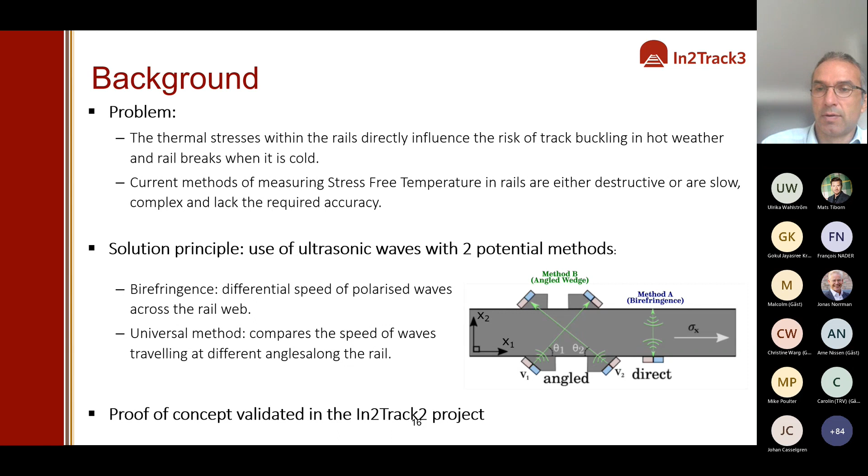This is a continuation of the In2Track2 project, because the proof of concept was validated during this project. For In2Track3, we want to make some in-field tests in order to reach TRL 6 or 7. The approach is first to develop mathematical models, then to make laboratory trials in order to show the relationship between the stress and the speed of sound of the waves.

Then there will be some full rail trials. For the birefringence method, we plan to make trials on multiple rails in order to assess the influence of the rail. Finally, there will be some tests carried out in the field, in full scale.

So far, the laboratory testing has been completed, and we made some first full rail testing. So you can see here the installation of the test rig, where there are the two methods that are installed. And so the first results are quite positive, at least for the birefringence one.

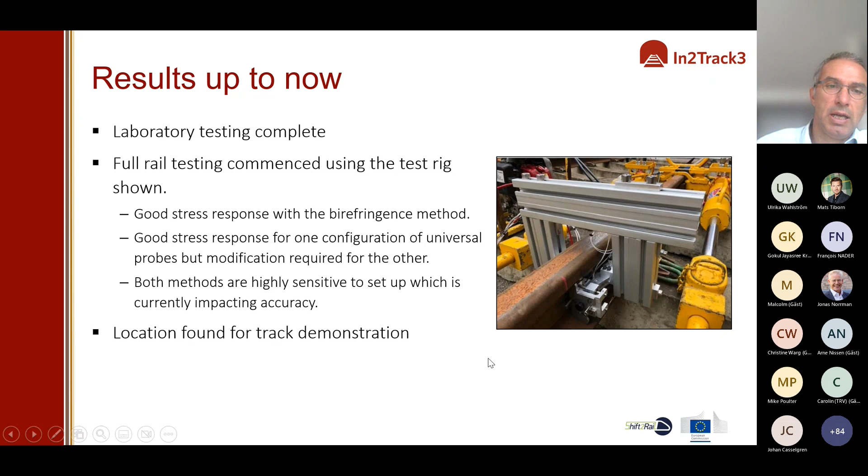And we have also found the location for the track demonstration. And so we need, by the end of the project, to complete the data analysis from the full rail test, to improve the setup in order to improve the accuracy and repeatability of the system. And there will be further tests on the birefringence method, and finally in 2023 we'll make the track demonstration.

So here the work is almost on plan, but we have to make further work that was not planned in order to improve the accuracy of the method.

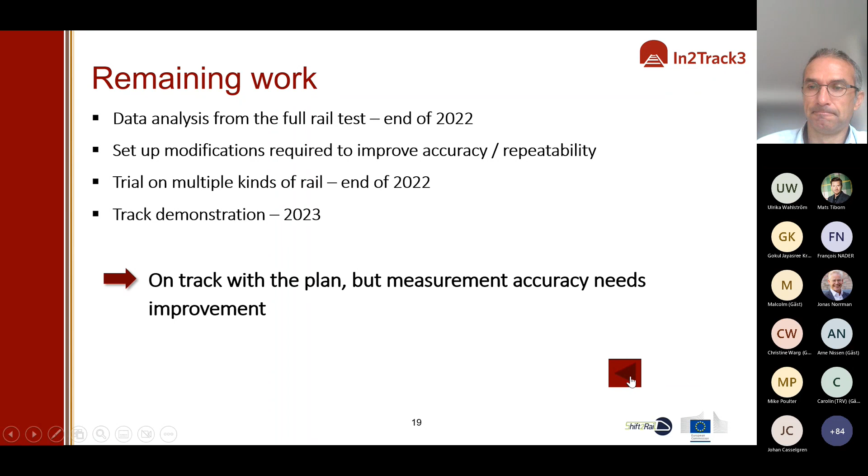So I move to the fourth technology, which is what we call EMAT sensors, EMAT1, and the aim of this technology is to improve the rail surface detection or inspection. So this study is led by Railenium.

And why are we doing that? It's because at the moment, rail inspection is usually made with the use of sensors that need to be in contact with the rail. So I'm talking about ultrasonic or eddy current technologies. But this contact can be difficult to ensure, and it can also be costly, because for instance when the ultrasonic sensor is installed on a train, we need to use a couplant like water in order to ensure good contact. And this sensor can also be sensitive to pollutants or oxidation on the rail.

So the solution that is studied is to use a contactless sensor, which are called EMAT. It stands for electromagnetic acoustic transducer. And we plan to use them on a remotely controlled trolley. So you get some pictures here of the defects that we want to detect, mainly head checks and squats, and also cracks.

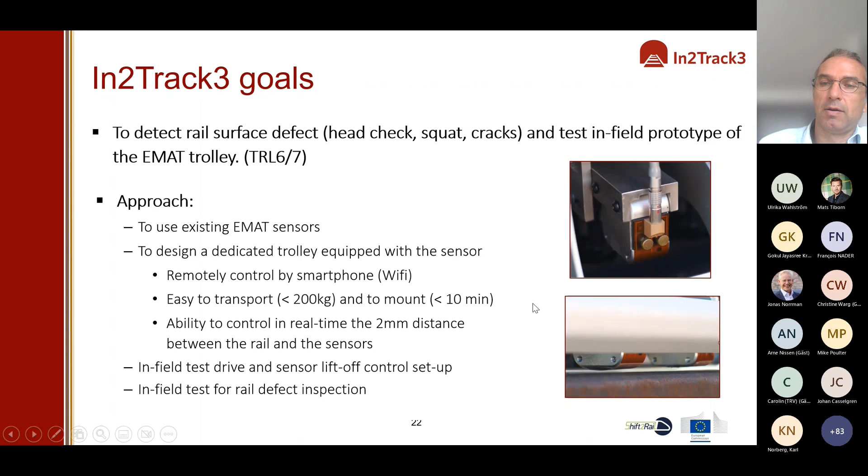So the results up to now are the following ones. The trolley has been manufactured. We've done the first drive setup trials, and the algorithm that will be used to detect the defects has been developed. We also did some first rail inspection in-field trial at Eurotunnel last month.

And what is remaining is to finish validation of the sensor liftoff control — liftoff being the distance between the rail and the sensors. We plan also to make a second campaign of tests, dedicated to rail defect detection. And then in 2023, we will use the measurement campaign in order to enhance the algorithm. So we are also on track with the plan.

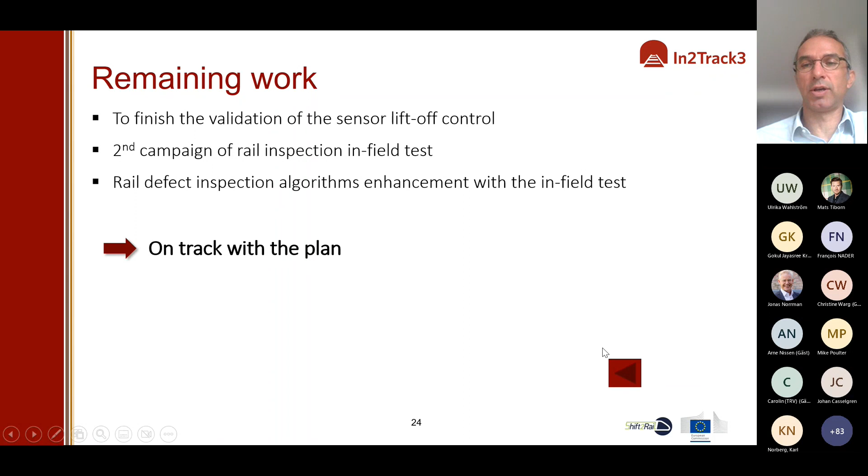And finally, I will present the technology of the autonomous trolley. This work is led by Network Rail. And so, as I mentioned before, manual inspection can be required on the tracks. This could lead to safety issues.

We could also improve the cost by using an autonomous trolley. Manual inspection is actually required when we make ultrasonic inspection with trains, because they cannot identify the precise detail and location of the defects.

The solution we are looking at is to design an autonomous trolley, which will have the following functionalities. First, it shall be able to inspect a significant length of the track, and then return to the start point without operator control. It will be able to confirm the defect that was identified by the ultrasonic inspection train, and then identify precisely the location of the defects. It shall also be able to mark where the defect is, and finally produce a downloadable summary of the defect location and depth.

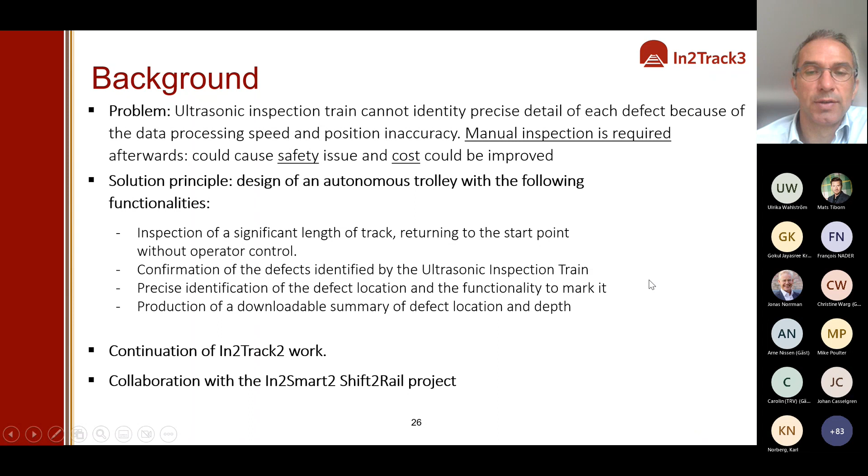For the In2Track3 project, we aim at making infield tests in order to reach TRL 6 or 7. The approach is to use and combine existing technologies.

These are the command and control system developed in In2Smart2, existing ultrasonic inspection systems, and artificial intelligence used for data analysis. Finally, the approach is to design the vehicle platform that will be used to install all the materials, and also to design the communication system between the different bricks of the system.

So up to now, we have purchased an electric trolley that is used as a basis for the study. The rail inspection system and the AI control system have also been selected, and we have identified the location where the track demonstration will be made. This track has the particularity that the defects on it are well known, so it will be easier to validate the autonomous trolley's performance.

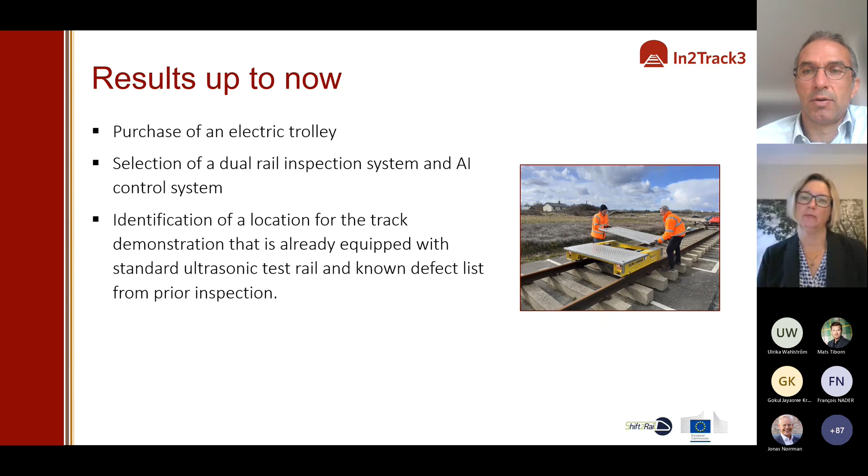So the remaining works are to complete the ongoing pieces of work, which are to adapt the control system, install the In2Smart2 command and control system, develop the communication protocols between the inspection equipment and the analysis and control systems, and also design the physical connection to couple the ultrasonic trolley to the electric trolley. We also plan to manufacture artificial defects, and finally to make track trials, which will happen in 2023.